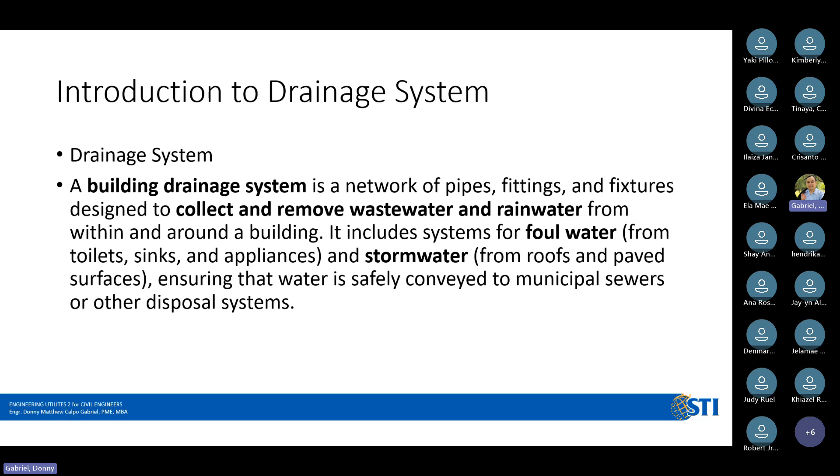Separate drain systems. Separate sewer systems have two separate pipes. One pipe carries the storm water, or yung galing sa alulod natin, and from storm drains to local streams. Pollution and trash in storm water flows to local streams with little or no treatment. A second pipe carries sanitary sewage, or yung foul water natin kanina, to the wastewater treatment facility.

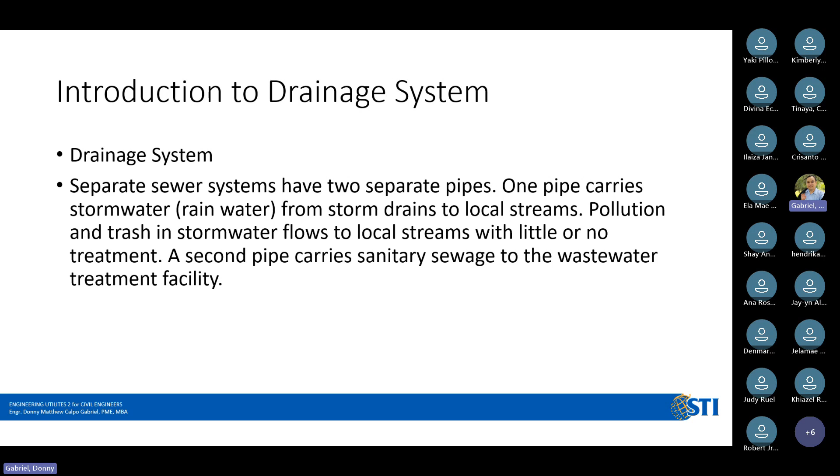So ito yun, no? So meron tayong usually dalawang klaseng drainage system. Ito yung nasa ilalim ng kalsada natin. One is the foul water or sanitary pipe or sanitary drain. Iba-ibang tawag, but it all means the same thing. This is the one that goes to the wastewater treatment facility, to the municipal wastewater plant. Yung sanitary pipe natin or yung foul water natin na galing sa toilet, sa washing machine, sa kusina, sa panglaba, sa pagluto, all goes to this sewage system or sanitary system, sanitary pipe.

Here is a diagram showing a building drainage system that connects to various fixtures and external sewage line. Ito yung sewage line natin, yung sewer line. Oh, sorry, kuha ko ng red pen. Going to the sewer line. Ito yung fixtures natin. Ito fixtures, water fixtures. Dito, mapapansin ninyo, meron tayong trap.

This is one of the components of a drain system - merong trap. Traps are installed under the fixture to prevent sewage gases.

So meron tayong vent dito. Itong vent, so ito 'yon. Pag inangat mo, ito yung vent. So ang dulo nito ay ito. This is just to prevent insects, small animals to go inside the pipe.

Yun ang purpose nito, para hindi pumasok yung small insects and small animals sa loob ng vent pipe. So the vent pipe would have sewage gases and also provides pressure neutralization. Para hindi ka magkaroon ng pressure buildup, kaya ka merong vent. So your sewage line or your drainage line will always be at atmospheric pressure.

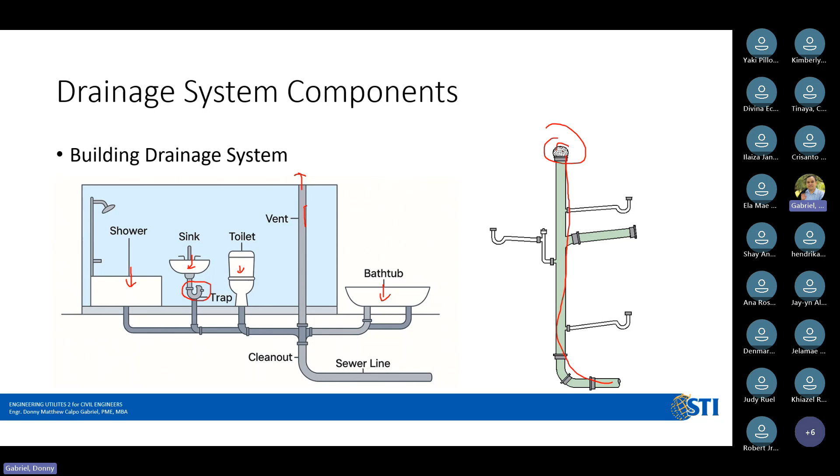We would also have inspection chambers to allow maintenance, or manhole. Ito yung manhole natin or inspection chambers. Kung mapansin niyo yung isang babae dito na news ito dati where this girl went inside the canal.

So ito yung sa stormwater drain going into the, not the wastewater treatment plant, but going to our local bodies of water. So these are some of the components of a drainage system that we should be aware of. Inspection chambers allows for maintenance or access. A stormwater drainage collects rainwater from roofs and paved areas, and external sewer connection for final discharge to municipal sewer or septic system.

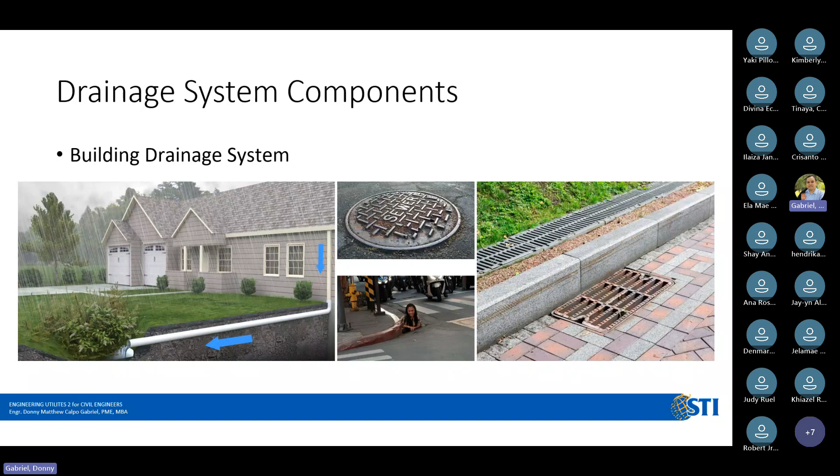Okay, some considerations on the design of drainage system. Some considerations that we have are gravity flow. By definition, most building drainage systems rely on gravity. This is what we have discussed earlier, to move wastewater from fixtures to sewer or septic system.

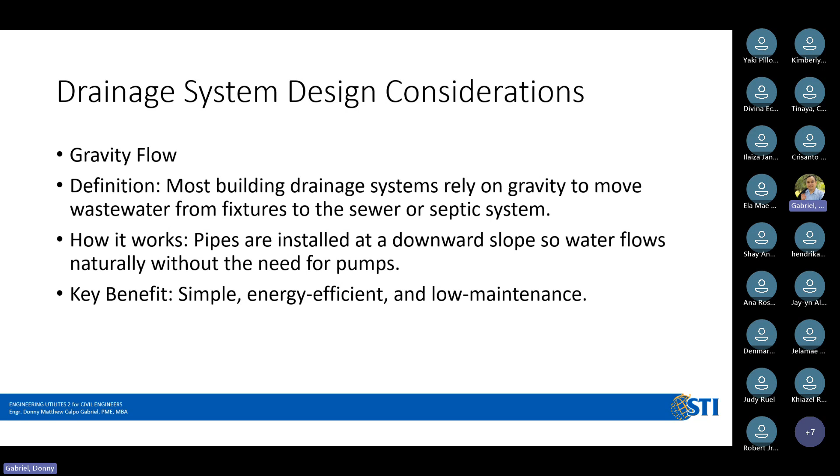How does it work? Pipes are installed in a downward slope so that water flows naturally without the need of pumps. This is a simple, energy efficient, and low maintenance system. Paano kapag yung discharge point mo o yung sewer line mo goes below or is higher than your own discharge line? So sometimes we use sump pit.

Ito yun, sump pit. Inside the sump pit, we have the sump pump. Kung halimbawa yung discharge point sa munisipyo would be somewhere here. So what happens is we collect all the sanitary waste or the sanitary drain or the wastewaters to the sump pit, and from the sump pit then we pump it out going to the discharge point.

But still, we use the gravity flow, so from the top of the building or the top of the facility going down to the lowest point would have the sump pit, and from the lowest point we have a discharge pump that would be connected into your sanitary point of connection.

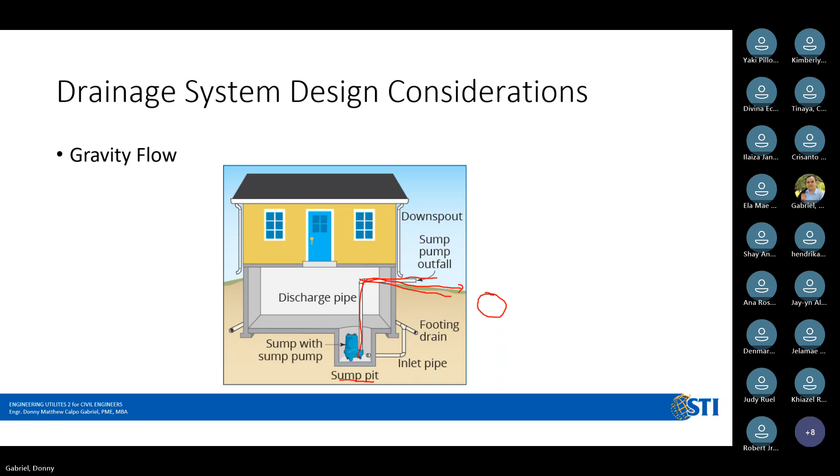Earlier we discussed that when you have a drainage system, it must be a sloped system, ibig sabihin nakatabingi. This is to take advantage of the gravitational force. So kung mapapansin nyo, yung mga horizontal pipe na to, hindi siya perfectly horizontal. Medyo pababa siyang paganyan. Bakit pababa? Pababa siya to ensure continuous flow.

However, when we slope our drainage pipe, we must ensure that there is a correct gradient. Gradient is how much slope that the pipe has with respect to the horizontal. For a typical slope, usually it's about 1% or 1 to 2%, or 1 to 2 centimeter per meter of drop of the line.

So ibig sabihin, kung itong from here to here is 1 meter, nakaslope siya, so ibig sabihin ito yung horizontal line. Ibig sabihin yung from here to here would be 1 to 2 cm. That's what it means to have a 1 to 2% drop. This is the typical slope for drainage system.

Why do we need to have this amount of slope? Bakit hindi natin gawing vertical o bakit hindi natin gawing babaan pa yung slope? When we have a slope that is too steep, yung tubig dadaloy, but the solid materials remain usually. Naiiwan yung mga solids, so what would happen is it would build up and it would clog up your drainage system.

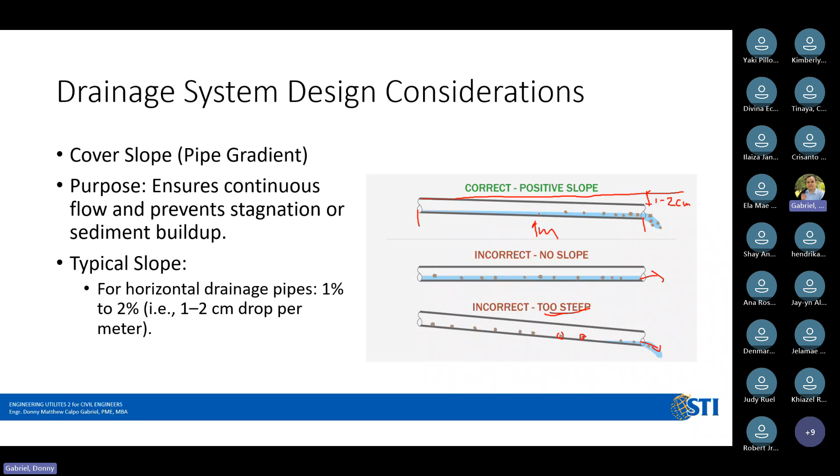So earlier we talked about water traps or water seals. We have different types of traps - U-trap, P-trap, bottle trap. But it all serves the same purpose: to hold a small amount of water to block sewer gases from entering the building. It acts as a barrier between the drainage system and indoor air, and it also prevents siphonage.

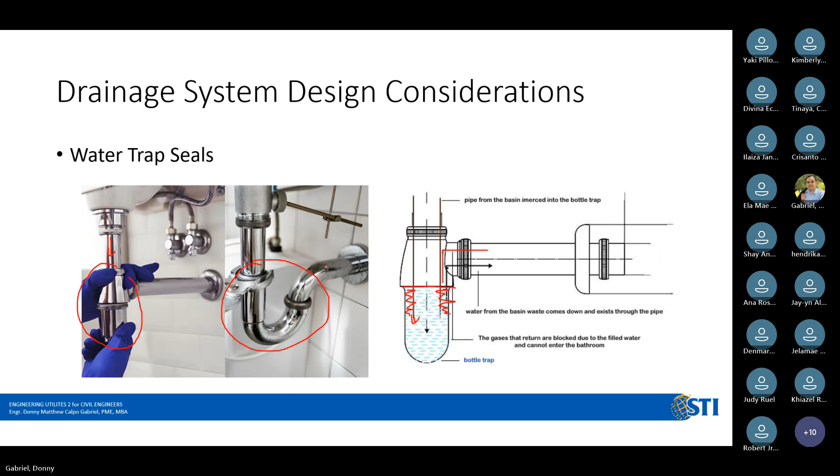Question? Okay, none yet.

Backflow prevention - sometimes the water we discharge into the drainage pipe goes back. It comes back up, even after you finish, it comes back again. Why does it come back? There's unwanted reverse flow of wastewater into clean systems or fixtures. Why would the waste come back after it's done?

Some of the causes would be blockages in the main sewer line - that's why it won't go down because it's blocked. Or sometimes there's flooding, so our drainage system has a higher water elevation than our fixture. Also, sometimes there's negative pressure in the system caused by flooding, leaks, or other things, or improper sloping of our drainage connection.

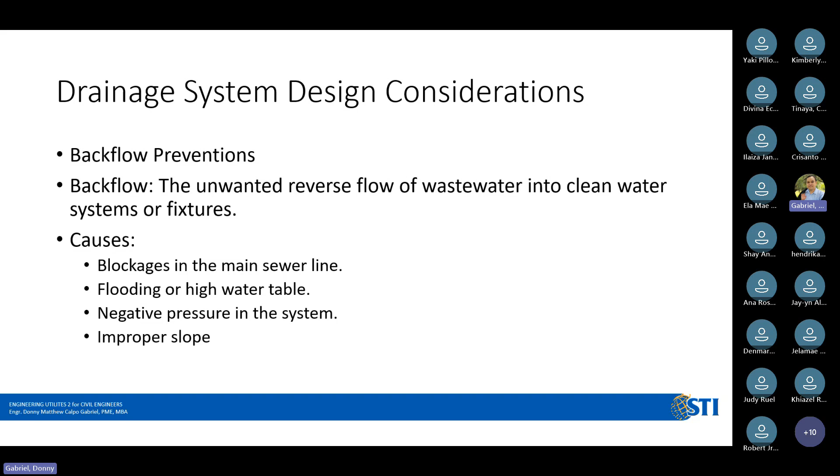So to prevent that, we have backflow preventers. As the name suggests, backflow preventers prevent the reverse flow of water. It automatically closes when water tries to flow backward. So for example, this part here only allows one direction of flow. When the water or fluid tries to come back, this gate closes.

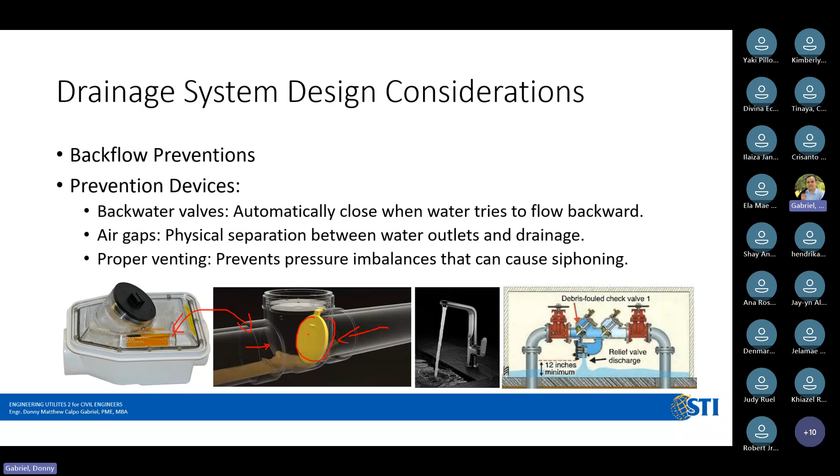Next is another design consideration: material selection and code compliance. Code compliance depends on where we are. We always follow the local code. If local code doesn't exist, then we follow the international code.

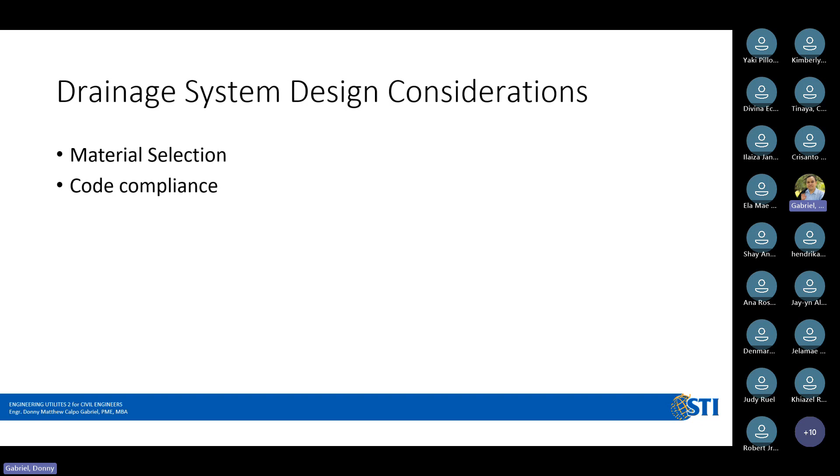For material selection, there are a few types of materials used in drainage systems. One of the most common is PVC pipe. It is lightweight and easy to install. However, it becomes brittle over time in extreme cold. It has smooth interiors to reduce clogging. It is cost effective, but not suitable for high temperature waste.

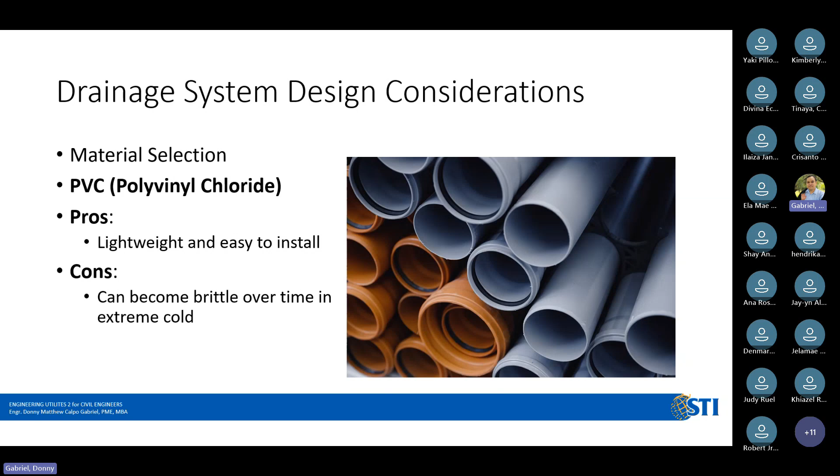Another type of pipe material is the HDPE, or high density polyethylene. You'll notice that PVC and HDPE look almost the same. Usually the PVC is the gray plastic, while the HDPE is the orange plastic.

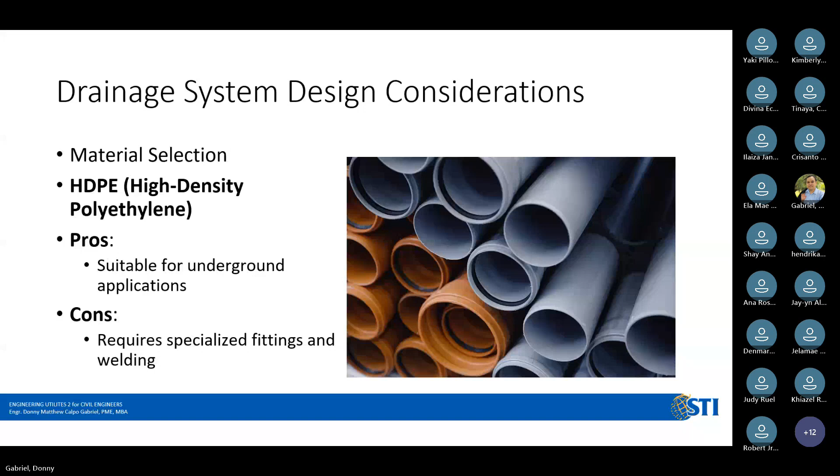Another common pipe material for drainage is cast iron. While HDPE and PVC last around 10-15 years, cast iron can last around 100 years. It is very durable and long-lasting, with excellent sound insulation, meaning you won't hear flushing or water passing through. It's very quiet, and it's also fire resistant, unlike PVC and HDPE.

However, because it's heavier, it's labor intensive to install. If you don't maintain it, coat it, or paint it, it's prone to corrosion. Cast iron is typically more durable but costs more, more expensive than HDPE.

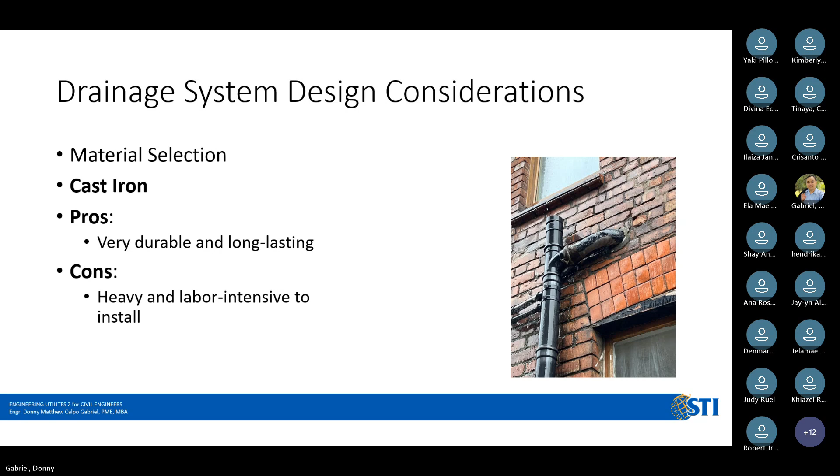Another material is copper. What's great about copper is that it's recyclable—old copper can be molded or extruded into new copper pipes. It is more environmentally friendly, and just like PVC, it is resistant to bacteria.

However, it is not resistant to acidic environments, so if you often use vinegar, copper is not ideal. It's also more expensive, but it is malleable and easy to install—copper piping installs quickly.

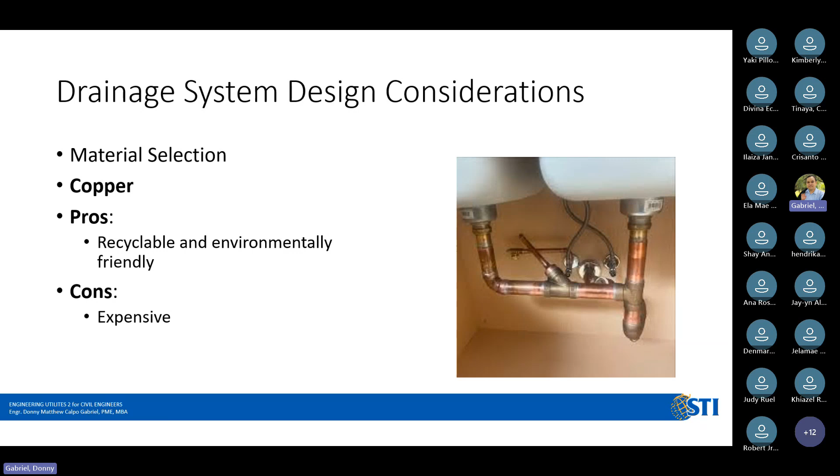Last but not least, we also have concrete. It's not a closed pipe anymore, but an open trench. Concrete is ideal for large-scale stormwater systems. It is extremely strong and durable, however it is very heavy and difficult to install, and prone to cracking over time.

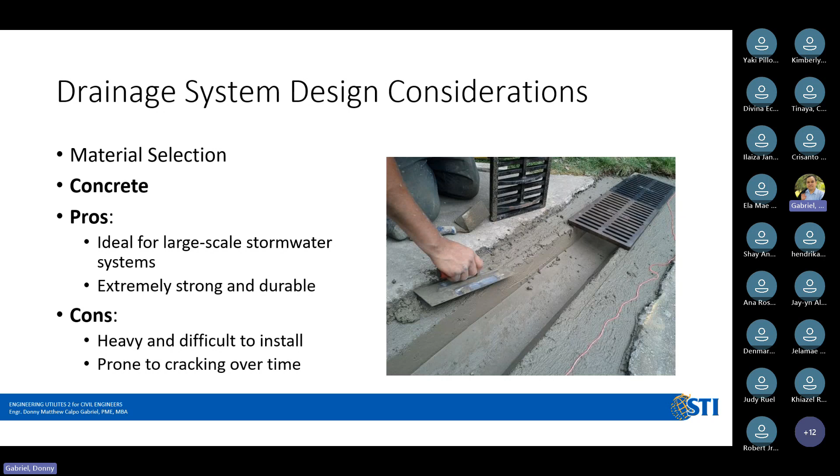So those are some of the common materials: HDPE, PVC, cast iron, copper, and concrete.

Moving to code compliance: the National Building Code of the Philippines is the primary legal document governing the drainage system. It sets standards for design, construction, use, occupancy, and maintenance of all public and private structures, including drainage infrastructure. Drainage plans must clearly show the routing and disposal method of wastewater, including locations for inspections and access.

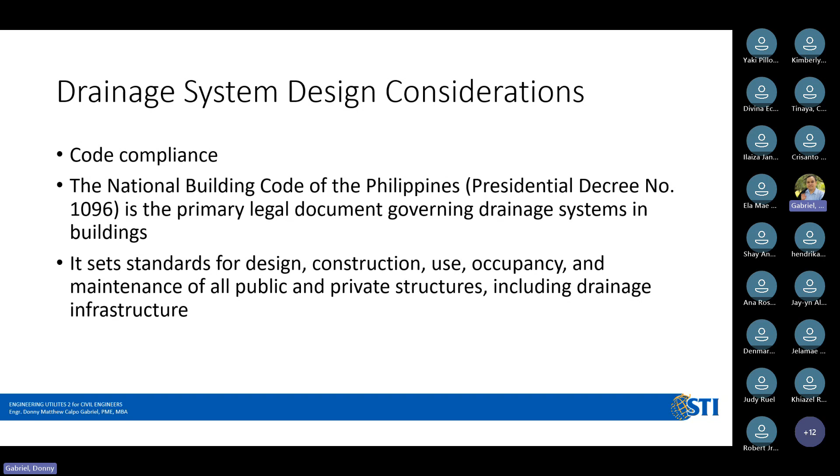That's what's stated in the National Building Code. Drainage drawings must be submitted as part of the building permit application, and only licensed architects are authorized to prepare, sign, and seal them. So the drainage plan is part of the architectural plan.

The DPWH enforces compliance through its NBCDO, or National Building Code Development Office. In a 2025 Supreme Court ruling, it was mandated that architectural permits must be signed exclusively by a licensed architect, reinforcing professional accountability. Local government units such as the DILG, PRC, and DOJ are aligning their policies to ensure nationwide effect.